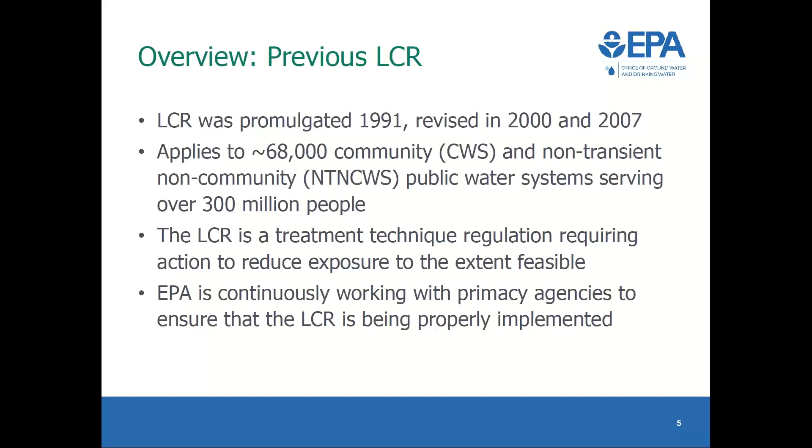Now, lead is generally not found naturally in water, but it can enter drinking water through the corrosion of lead-containing plumbing materials and infrastructure. In order to prevent lead from entering our drinking water, the lead and copper rule requires some systems to treat water with chemicals to reduce corrosion. When corrosion control treatment is not enough to reduce lead exposure, systems are required to educate the public about lead risks in drinking water and to replace lead service lines. Next slide, please.

So as part of the lead and copper rule revision process, EPA conducted extensive consultations with stakeholders and the public. The proposal was published in November of 2019, and we received about 80,000 public comments. The final lead and copper rule revision identifies the most at-risk communities and ensures that water systems are prepared to rapidly respond by taking actions to reduce elevated lead levels in drinking water. Next slide, please. Now I'm going to go into a little bit more detail about the specific requirements of the revised rule and how they compare with the current rule or soon to be previous rule. Next slide.

So some important terminology to go over. The maximum contaminant level goal is a health-based value and is set where there are no known health effects within an adequate margin of safety. In the current rule, the MCLG is set at 0 because there is no safe level of lead. For copper, the MCLG is set at 1.3 milligrams per liter.

As I mentioned previously, in 1991, the lead and copper rule established a treatment technique rule, which includes public education, corrosion control treatment, and lead service line replacement if a system exceeds the action level for lead or copper. The action level is based on the 90th percentile of tap sampling results, and for lead, this is set at 15 micrograms per liter and copper at 1.3 milligrams per liter. It is important to note that exceeding the action level is not a violation in and of itself, but not taking one of the required actions is.

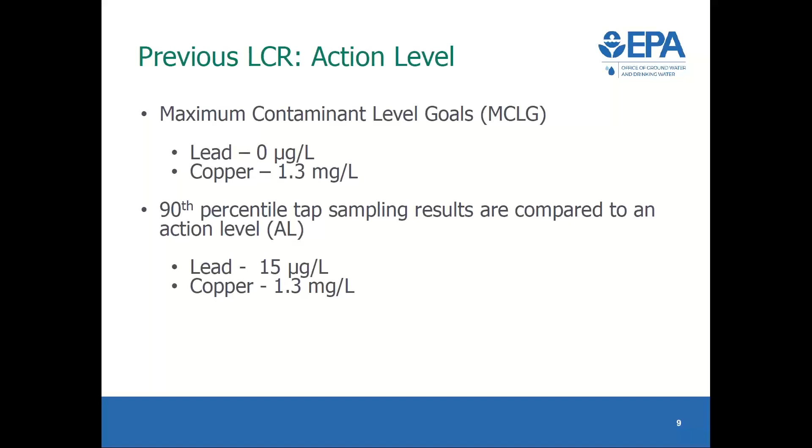So the revised rule establishes a new trigger level, which allows for meaningful reduction in lead exposure by requiring systems to take a progressive set of actions to reduce lead at the tap. The trigger level is set at 10 micrograms per liter, and this is in addition to the action level and not a replacement. For water systems that exceed the trigger level, but not the action level, there are some new requirements. They must sample annually and are not eligible for reduced tap sampling.

They must implement a goal-based lead service line replacement program and conduct public education outreach to customers with lead service lines. Systems must also conduct a corrosion control treatment study if they do not already have CCT installed, and they must re-optimize their CCT if they do have it installed. And I'm going to go over some of these actions in a few minutes.

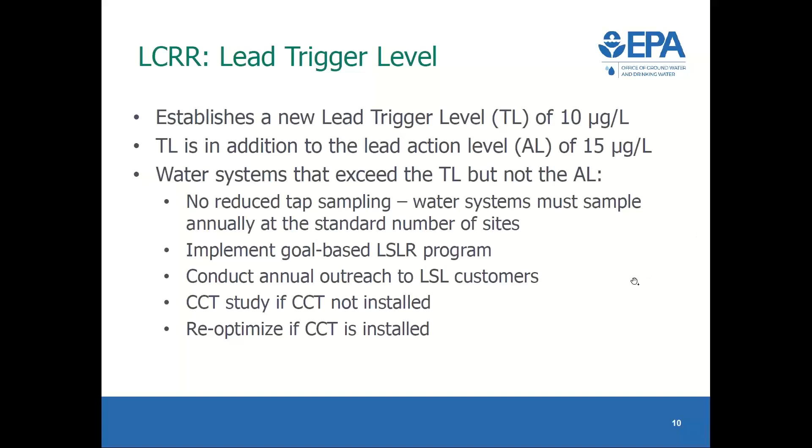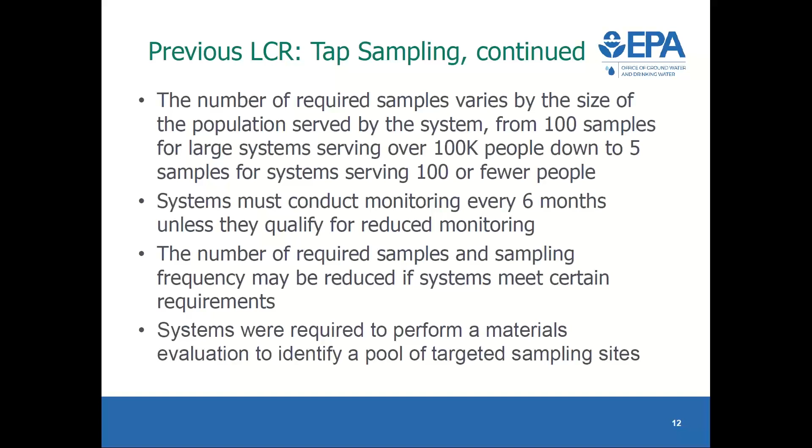Next slide, please. So currently, all community water systems and non-transient, non-community water systems must collect first liter tap samples at homes and buildings that are at the highest risk for lead and copper contamination. The number of samples required varies by the size of the population served by the system, and this can range from 100 samples to 5. The rule requires 6-month monitoring, but systems can reduce the number of required samples and sample frequency by meeting certain criteria. Systems are also required to perform a materials evaluation so that they could identify the sampling sites.

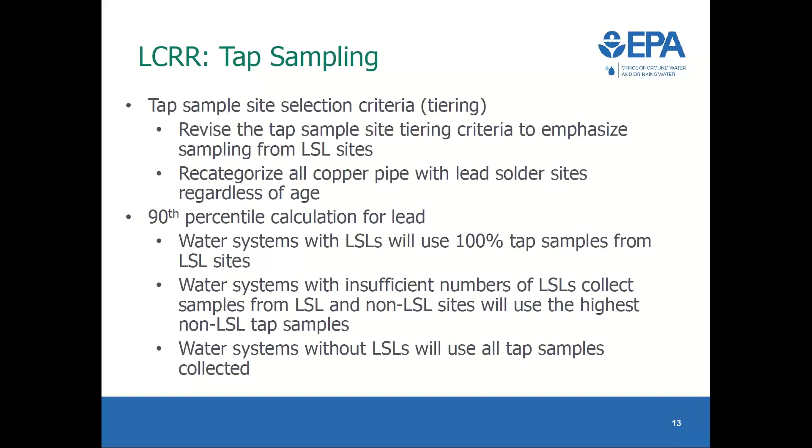There's also been a change in the tap sample collection protocol. So for all lead service line sites, the 5th liter must now be collected and analyzed for lead. This 5th liter is representative of the water that's been in contact with the lead service line. If the water system is also collecting copper at the same time, they must retain the 1st liter sample for copper analysis. The revised rule also prohibits systems from including instructions to remove and clean aerators prior to doing sampling or any pre-stagnation flushing, which might depress lead levels.

Systems must also provide wide-mouth bottles for tap sample collection, which allows for flow rates that are more characteristic of flow when filling a glass of water. Collectively, these sampling requirements will better identify elevated lead levels and result in more water systems taking required lead mitigation actions. In terms of the monitoring frequency, systems will now need to have lower lead levels longer in order to go to reduced monitoring.

Systems that are above the trigger level but below the action level must monitor at least annually and are not eligible for triennial monitoring. Systems above the action level must monitor every 6 months and must have results at or below the action level for 2 years or 4 monitoring periods in order to move to annual monitoring. Also, systems with new sources or a long-term treatment change must do 6-month monitoring until they have the results at or below the action level for 2 consecutive monitoring periods.

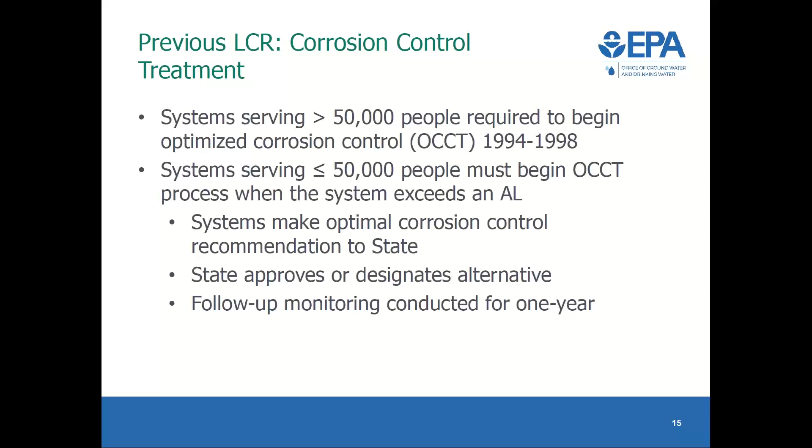Using that monitoring data, the state designates optimal water quality parameters, and the system must maintain those OWQPs. So as I mentioned earlier, exceeding the action level is not a violation, but failure to maintain the optimized water quality parameters is. One important thing to note here is that small and medium systems under the current rule can discontinue the OCCT steps if they meet the action level in 2 consecutive monitoring periods. So one thing we were seeing is that systems would be in this cycle of starting and stopping the OCCT steps and might not actually ever install corrosion control treatment.

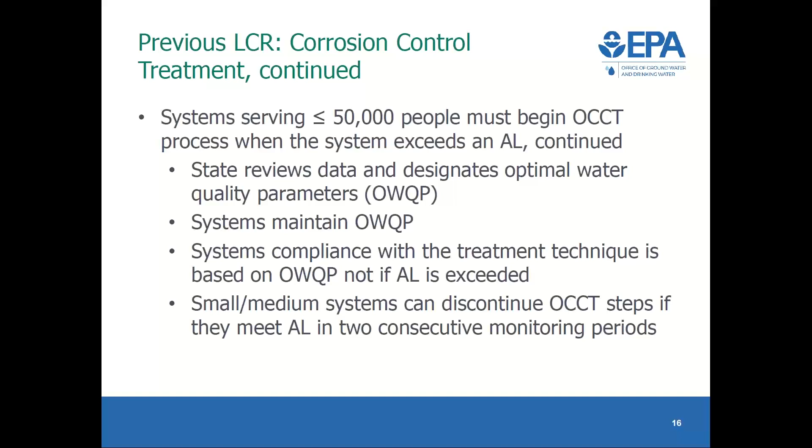Under the revised rule, water systems with OCCT are required to re-optimize if the 90th percentile exceeds either the trigger level or the action level. Systems without OCCT must conduct a study if they exceed the trigger level and then implement it if the action level is exceeded. So this means that systems will be prepared and able to install CCT faster than under the current rule. The rule also revised the sanitary survey requirements to include CCT and OWQP assessment.

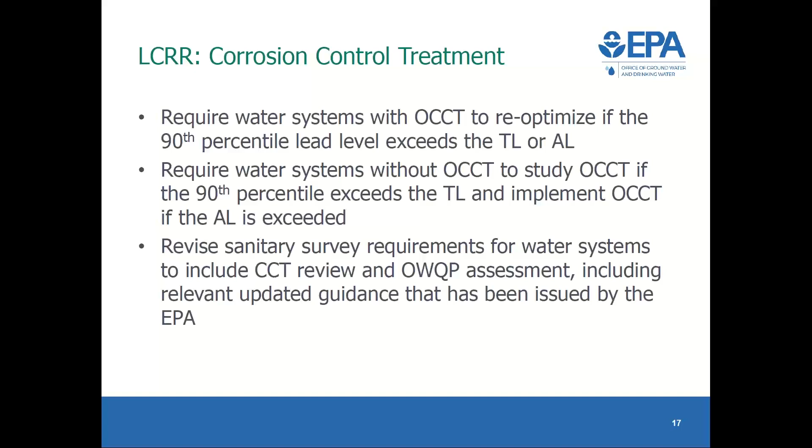So as part of the study, the revised rule requires that systems evaluate orthophosphate-based inhibitors. The rule also establishes some additional specifications for systems to study alternative CCTs. It also requires systems to conduct a find and fix for any individual tap samples that exceed 15 micrograms per liter. Next slide, please.

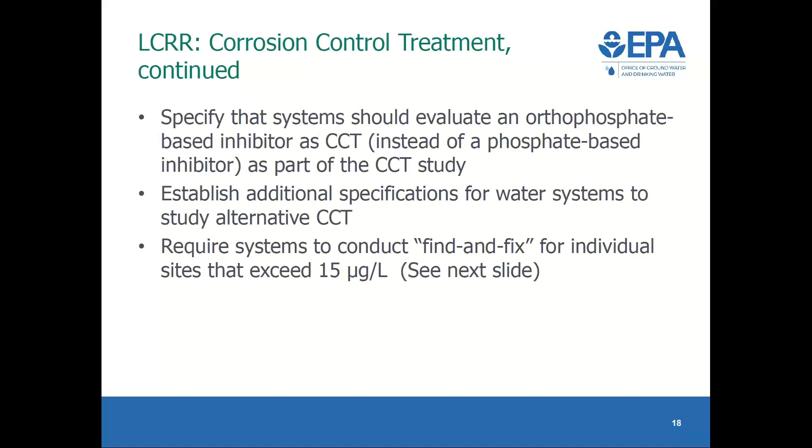Find and fix is a new requirement to address individual tap sites that have elevated lead samples, even if a system does not have a trigger level or lead action level exceedance. It requires that a system collect follow-up samples for each lead tap sample site that exceeds 15 micrograms per liter within 30 days of the system receiving the results to identify the potential source of lead. Systems may use any sampling protocol or technique to collect the follow-up samples.

So if the sample came from a lead service line site, that doesn't mean that the system has to collect a 5th liter sample. They could take a 1st liter sample or 250 mil or use different stagnation time, whatever is most appropriate to identify that source of lead. And as such, these follow-up samples are not included in the 90th percentile calculation, but they do need to be submitted to the state. Next slide, please.

If a system does have CCT installed, they must collect a water quality parameter sample within 5 days of receiving results at a site that is as close to the tap sample site as possible. Could you go back 1 slide, please? Thank you. This is to assess water quality as close to the time the initial sample was taken as possible.

Systems then must determine if some sort of a fix is needed, and this could be something like a localized adjustment to CCT, conducting flushing, or another type of localized distribution system maintenance. And I should note that EPA does not anticipate that systems will make large-scale CCT changes resulting from find and fix. Systems are also not responsible for fixing things that are deemed outside of their control, such as a premise plumbing issue. But they must document this to the state.

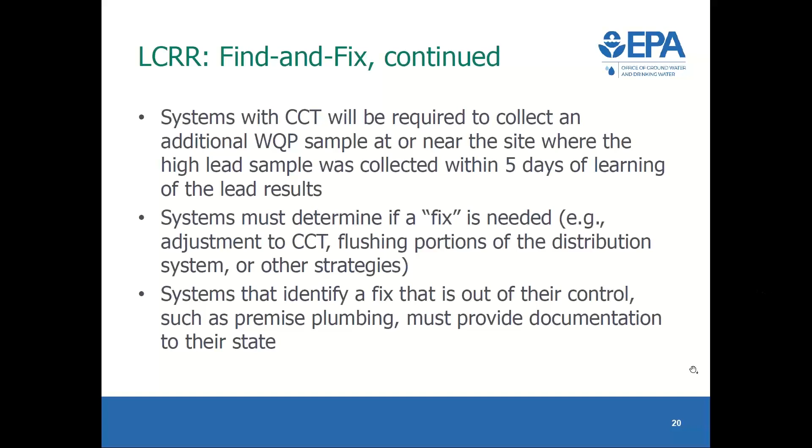Thank you, Anne. I will start with the lead service line replacement.

Current rule requires systems that fail to meet the lead action level after installing corrosion control to replace 7% of lead service lines per year. They are only required to replace their portion of the service line, so the partial lead service line replacements are allowed to count towards the mandatory replacement rate.

Water systems are also allowed to test out, which means that if they take a water sample from a lead service line and it tests at or below 15 parts per billion, then that would still count as a lead service line replacement. If the system does not own the entire lead service line, they must notify the owner that they are replacing their portion of the service line and offer to replace the owner's portion of the line at owner's cost. Lead service line replacement continues until the system meets the lead action level for 2 consecutive monitoring periods.

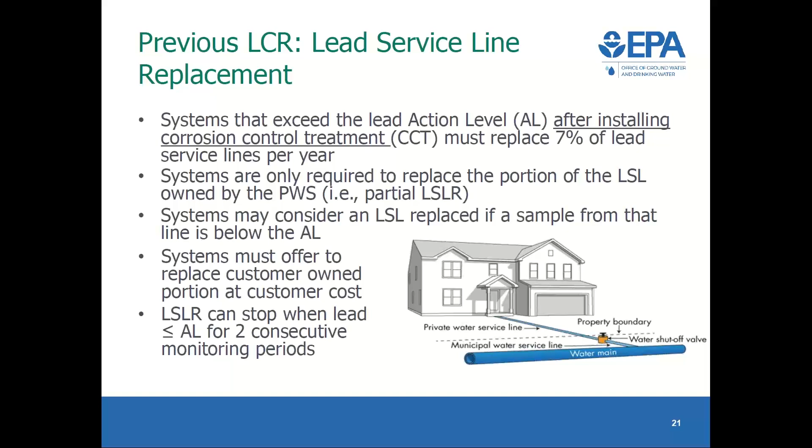If the system exceeds the lead action level after that, they must restart replacing lead service lines. Next slide, please.

The new rule starts with a lead service line inventory. Water systems must complete a lead service line inventory by the compliance date of January 16, 2024. This is important as the location of lead service lines is critical to tap sample site selection and tap sampling protocol. The inventory must identify materials of service lines within the distribution system and classify them according to this categorization.

Lead service lines; lead status unknown, or just unknown, where the service line material is not verified by the compliance date. It's okay to have unknowns in the initial inventory with improvements in updates. Then galvanized lines requiring replacement, and non-lead service lines. The inventory must be made publicly available. Lead connectors, such as goosenecks or pigtails, are not required to be included in the inventory. However, EPA does recommend including them where records exist.

Another component of the new rule is that the water system must replace lead connectors when encountered. The inventory must include a location identifier associated with each lead service line or galvanized line requiring replacement. The inventory must be updated annually, or triennially if the system is on reduced monitoring. Next slide, please.

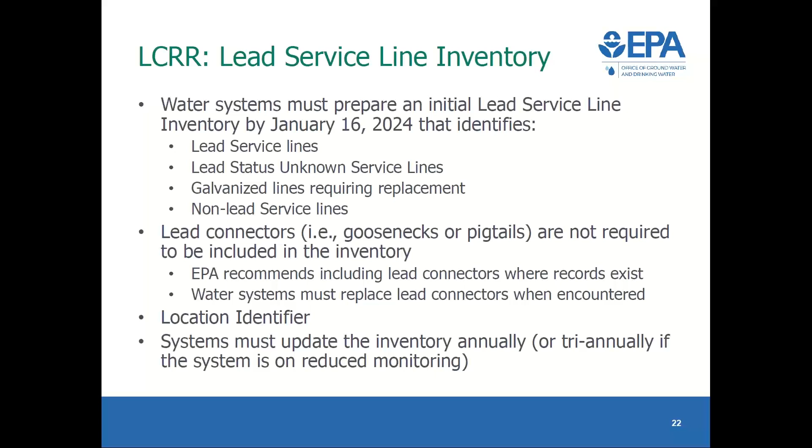A new component of the revised rule is the lead service line replacement plan, which must be submitted by the compliance date along with the inventory. According to this provision, all water systems with 1 or more lead, galvanized requiring replacement, or unknown service lines in their distribution system must prepare a sufficiently detailed lead service line replacement plan by the compliance date.

The plan must include the following 7 elements: a strategy for determining the composition of lead status unknown lines, a procedure for conducting a full replacement, a strategy for informing customers before a replacement takes place. For systems serving more than 10,000 people, the plan must recommend the replacement goal rate in the event of a lead trigger level exceedance, which I will discuss in a minute. A procedure for customers to flush the lines following a disturbance or a replacement of the service line.

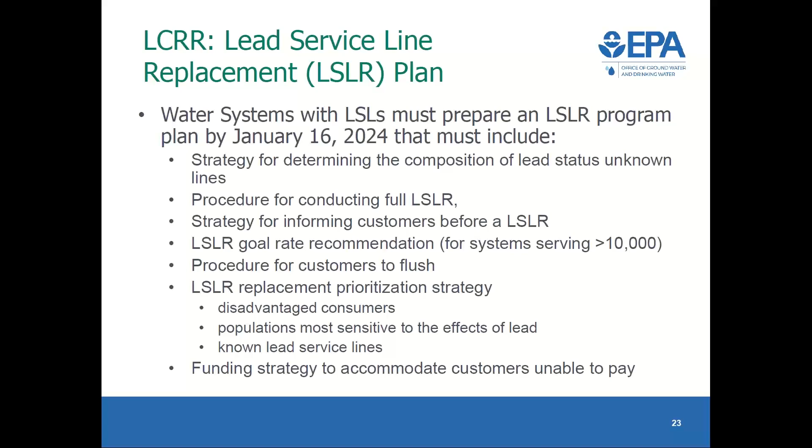A lead service line replacement prioritization strategy that at a minimum includes disadvantaged consumers, populations most sensitive to the effects of lead, and targeting known lead service lines. And the plan must include a funding strategy to accommodate customers unable to pay. Having a plan in place not only helps water systems to be ready on the compliance date, but also in general helps them meet their goals, and they are prepared when customers notify them of the intent to replace their portion of the service line. Next slide, please.

When a customer notifies the water system of replacement of the customer's portion of the service line, the water system must replace its portion of the lead service line as well. This is to prevent partial lead service line replacements from occurring.

Water systems that serve more than 10,000 persons that exceed the trigger level but are at or below the action level must conduct goal-based full lead service line replacement at a rate approved by the state, irrespective of the corrosion control treatment status. Water systems serving 10,000 people or fewer that exceed the lead trigger level, but not the action level, may choose the small system flexibility, which I will discuss shortly. Next slide, please.

In terms of mandatory lead service line replacements, water systems serving more than 10,000 persons that exceed the lead action level must fully replace annually 3% of lead service lines based on a rolling 2-year average. In these cases, they must conduct replacements regardless of the status of the corrosion control treatment. They can stop the 3% annual lead service line replacements when the system is below the action level for 2 years, and if the system has replaced an overall average of 3% of lead service lines per year.

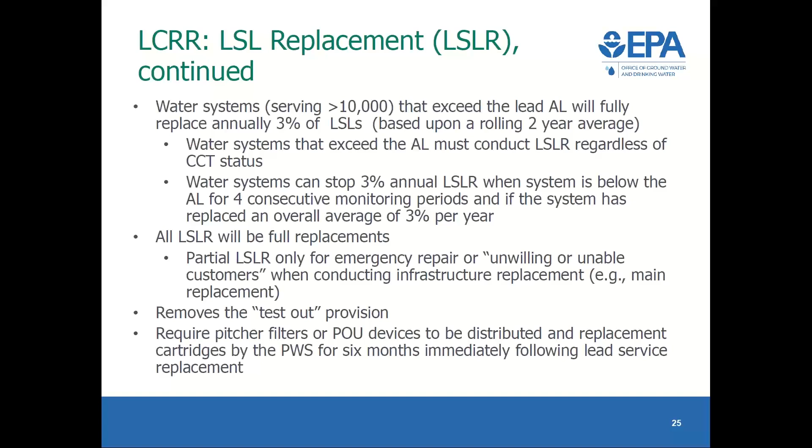For mitigation purposes, after a service line replacement, the revised rule requires public water systems to distribute filters and replacement cartridges for 6 months. Next slide, please.

As presented here in this comparison table, the revised lead and copper rule will result in overall more lead service line replacements than the previous rule. The new rule requires 3% replacements. However, it must start regardless of the CCT status. The replacements must be full replacements, and it must continue for at least 3 years, which is four monitoring periods.

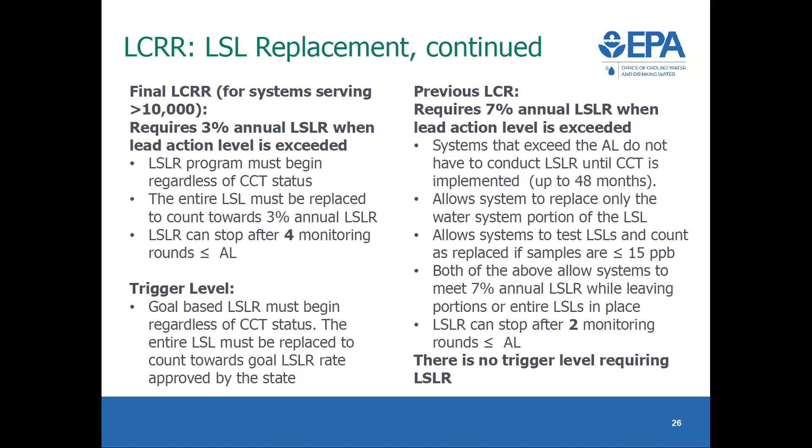The lead service line replacement rate of the new rule applies to a wider universe of service lines, which includes lead service lines, galvanized requiring replacements, and unknowns that could potentially be lead service lines. Also, in the new rule, the replacement program starts sooner at the exceedance of the trigger level, as opposed to the old rule, where it starts at the action level exceedance. Next slide, please.

Small system flexibility. So in the previous slides, I discussed requirements for systems serving more than 10,000 people. The new rule provides systems serving 10,000 or fewer persons and all non-transient, non-community water systems greater flexibility to comply with the requirements of the rule. Under the new rule, if these systems exceed the trigger level but do not exceed the action level, they must evaluate and recommend to the state one of the 4 compliance alternatives.

The compliance alternatives, which must be approved by the state, include full lead service line replacement. It should be noted that all lead service lines must be replaced within 15 years, and once the implementation of this option starts, the replacement cannot stop even if water lead levels drop. The second option is installation and maintenance of optimized corrosion control treatment.

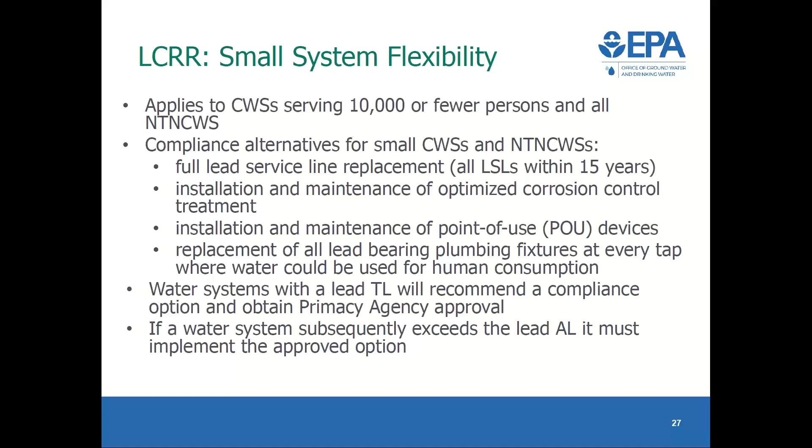Then it's installation and maintenance of point-of-use devices and replacement of all lead-bearing plumbing fixtures at every tap where water could be used for human consumption. This applies to systems that have replaced all of their service lines, but the lead levels are still high. In the event a water system subsequently exceeds the lead action level, it must implement the approved option. Next slide, please.

Moving on to the requirements of the revised rule for notification and public education. The revised lead and copper rule provides more information to the public, such as it requires that water systems let the public know the general location of lead service lines by making the lead service line inventory publicly available. And for large systems that serve over 50,000 people, the inventory must be available online.

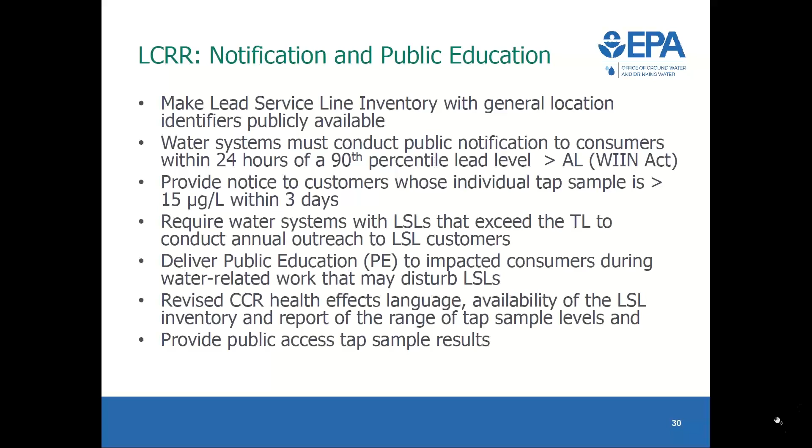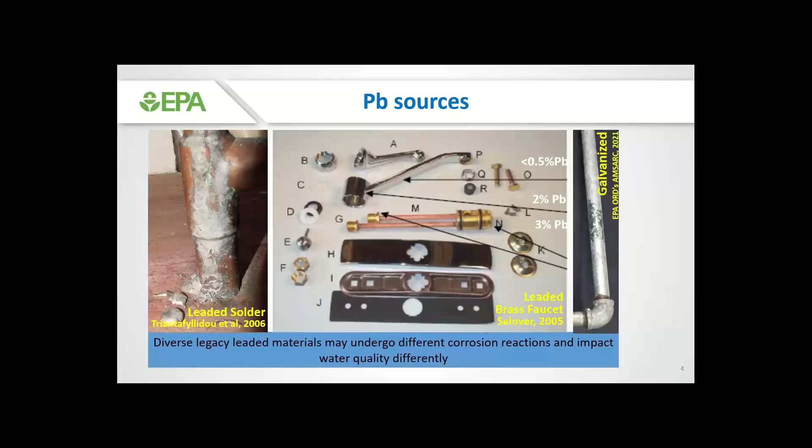Galvanized pipe is also a source of lead. Aside from the impurities of lead on the galvanization layer, perhaps its biggest contribution to lead is the fact that it sorbs lead from upstream sources and then becomes itself a source of lead and desorbs that lead back into the drinking water. Because these diverse legacy leaded materials may undergo different corrosion reactions, interact with the water chemistry differently, and result in different levels of lead contamination, it is important to have an understanding of exactly which lead sources we have in our system.

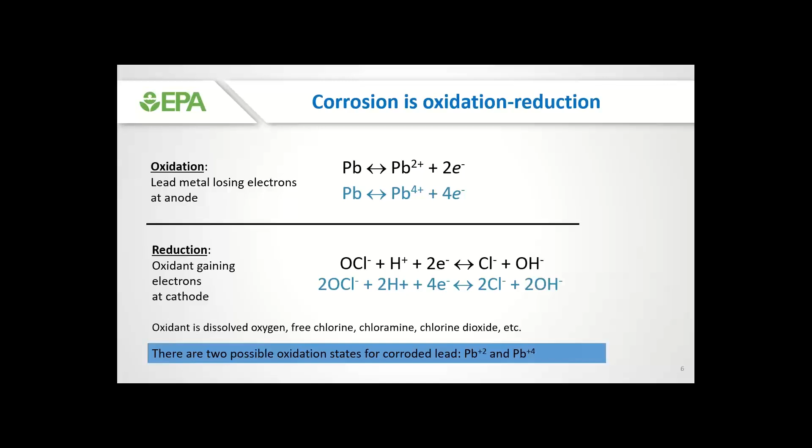Reduction is usually happening by a disinfectant in the water, some sort of oxidant, such as chlorine species, for example, if we add chlorine in the water for disinfection, and the oxidant consumes the electrons that were released by the lead metal when it was oxidized. There are two possible oxidation states for corroded lead, either lead +2 and lead +4, and those will become important in a minute.

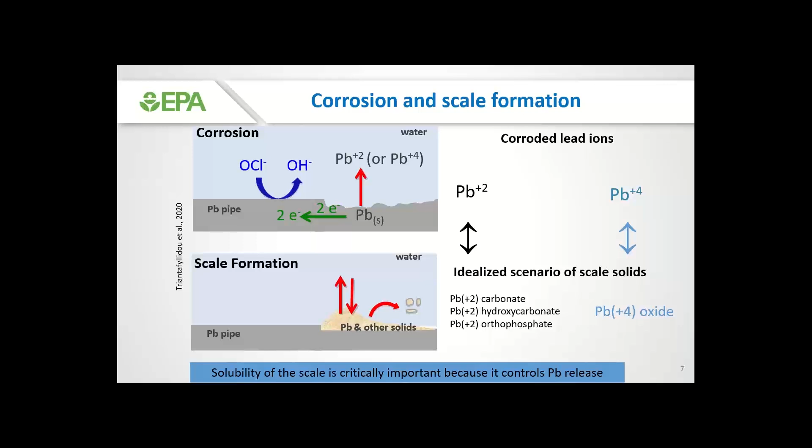We're not necessarily going to go into particulate lead release in this presentation. It's a pretty complicated and hard to predict, almost semi-random phenomenon, but it's also important in total lead release as well. The minerals that were mentioned in the previous slide are kind of idealized situations.

In practice, scale on the interior surface of lead pipes can be very complex, and these are photographs of lead pipes received at EPA's AMSARC and analyzed here. They're close-up photos of what pipe scales look like in 9 samples that were analyzed, and you can see that there really is, at least visually, a variety of scale. They have different colors, they have different textures.

In some cases, like in the top right pipe, you can see that part of the scale basically was dislodged from the pipe. So these are very complicated situations, not as simple as I made them sound in the previous slide. In some cases, we may even have other constituents on the scale, not just lead. Those could be anything from aluminum, manganese, iron, phosphorus, and calcium. And if we have coatings like that, which are thick, they may actually interfere with the orthophosphate chemical that we want to add for corrosion control.

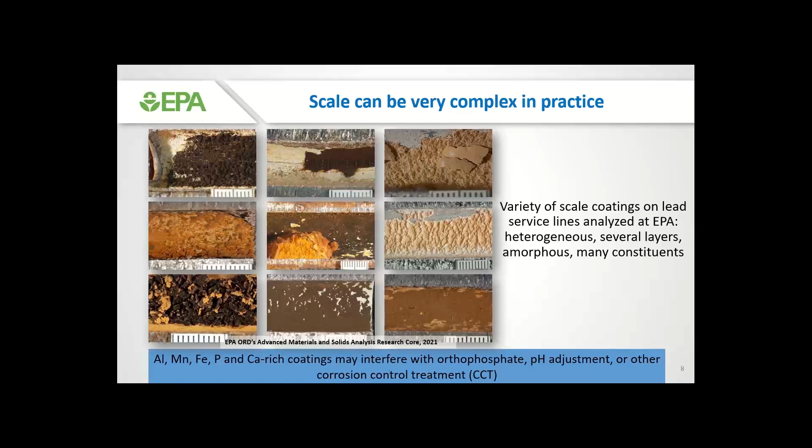They may interfere with pH adjustment or other corrosion control treatment that we choose. So going back to that concept of corrosion and metal release, pure corrosion itself, so those reactions of oxidation reduction that are electrochemical and we have electrons flowing, those are important for pure fresh lead pipe at the very beginning, but they become less important when the surface of the pipe becomes covered with scale.

So for legacy pipes being in service for decades or even a century or more, pure corrosion is not as important. What becomes important is that makeup of the scale that has formed, and specifically the lead solubility of that scale at the water contact. Also the physical properties of the scale, how easily it can be physically destabilized by hydraulic disturbances.

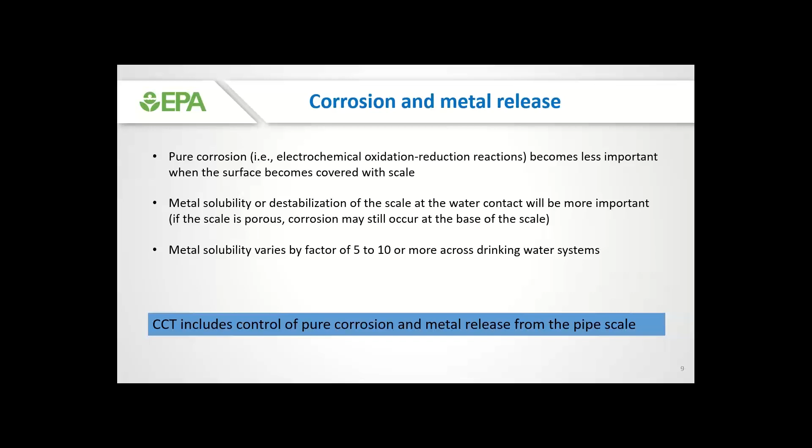Because the makeup of the scale is so different among drinking water distribution systems, lead solubility, therefore, is very different among systems. It can vary by a factor of 5 to 10 or more, and it's important to understand which waters are corrosive and which are not corrosive, and really try to control the corrosivity through appropriate corrosion control treatment, which needs to address both that early process of pure corrosion, but also metal release when we have the scale that has formed.

There are many factors that affect corrosion and metal release, and we don't have time to talk about all of them, but we will talk about some key ones. So we'll talk about pH and the carbonate system expressed by alkalinity or else dissolved inorganic carbon. We'll talk about the presence of oxidants in drinking water, primarily disinfectants, because those affect the oxidation reduction potential of the water or else its oxidizing power. We'll also talk about corrosion inhibitors and some particularly important ions like chloride and sulfate.

Let's start with pH and oxidation reduction potential because they really control metal release. This is a simplified Pourbaix diagram. You can see on the x-axis pH ranging from 0 all the way to 14. And on the y-axis, you can see that oxidation reduction potential of the water. In drinking water situations, we always have an ORP that's high enough to unfortunately not be in the immune area of the graph. That would be basically the lead pipe not corroding, just staying in place as a solid.

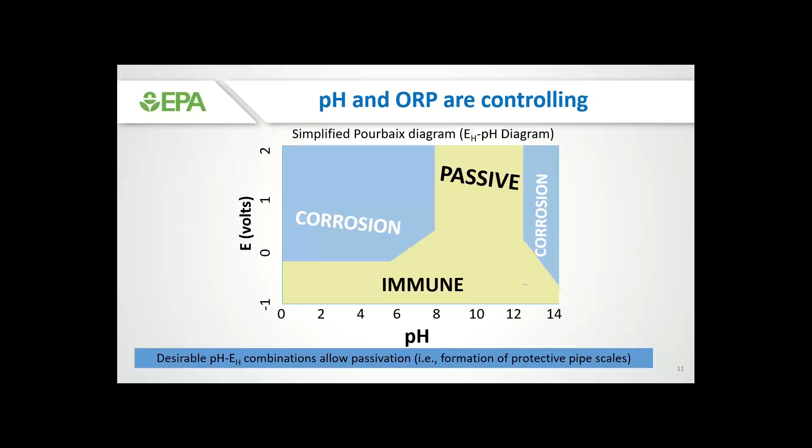But our second best bet is to create conditions that allow us to be in that passive area of the graph where we have just the right combination of pH and ORP to form these protective scales. Because if you look in this generic simplified Pourbaix diagram, if we move to the left of that passive area or to the right, we're actually in the active corrosion region, which we want to avoid. So we want to have desirable pH and ORP combinations to allow for formation of those protective scales.

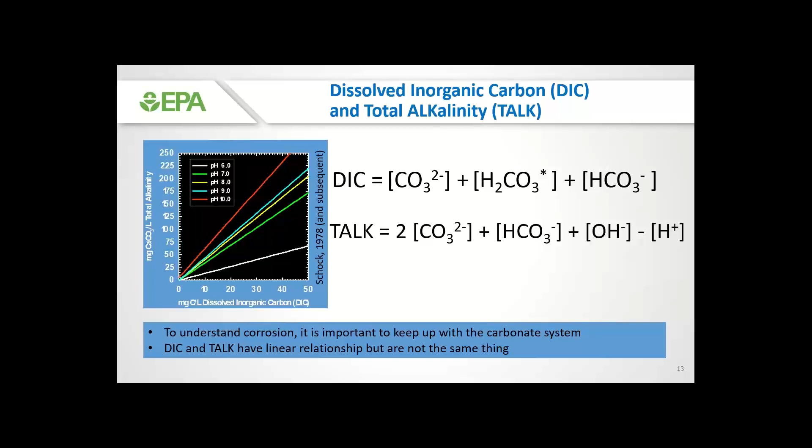But we also measure our alkalinity as well, and this is the simplified equation for alkalinity in most drinking waters. Alkalinity also involves carbonic species, as you can see, but OHs and H+, which means there's a pH dependency as well. To understand corrosion, it is important to know what the DIC is or what the alkalinity is in our drinking water. And those two do have a linear relationship, but they're not the same thing. If we know the pH and know one of the two, we can basically calculate the other. The diagram on the left here is basically showing that linear relationship between DIC and alkalinity.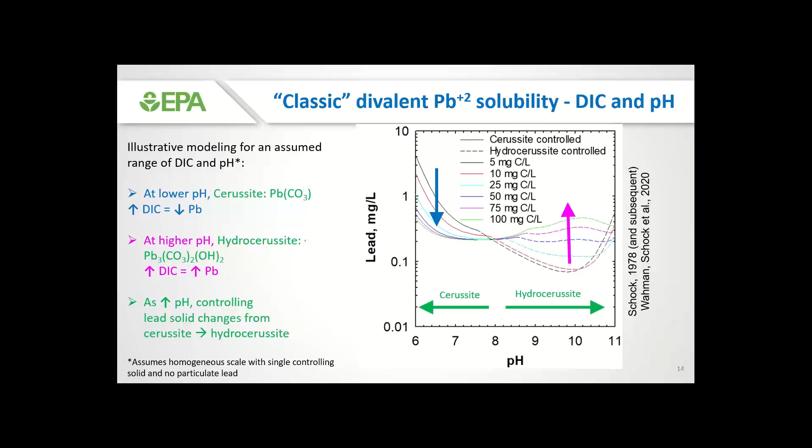It is based on theoretical solubility modeling. So it does assume a homogeneous scale with a single controlling solid, either cerussite, which is a lead carbonate, so again the DIC is important because it gives the CO3 component to form that solid, or hydrocerussite, where again DIC is important, forming the lead hydroxycarbonate. But the impact of DIC is different depending on where you are on the graph. And you'll see that there is kind of a narrow pH range at the upper 7s or around 8, where actually the impact of DIC is not as important as it is in other areas of the graph.

I talked about ORP earlier. ORP is really important, but we don't typically measure it in drinking water. It is the oxidation reduction potential of the water, and it's highly dependent on the disinfectant type and dose. These are measurements from an older experiment at the EPA, where you can see on the x-axis the oxidant dose in milligrams per liter added to the water versus the ORP measured on the y-axis.

So at the bottom of the graph, you see data for just dissolved oxygen, no disinfectant added to the water. In the middle, you can see monochloramine, NH2Cl, and at the top with the red color and the green color, you can see chlorine species. So different oxidants really truly have different oxidizing power. For example, you can see here that ORP for chlorine is higher than monochloramine.

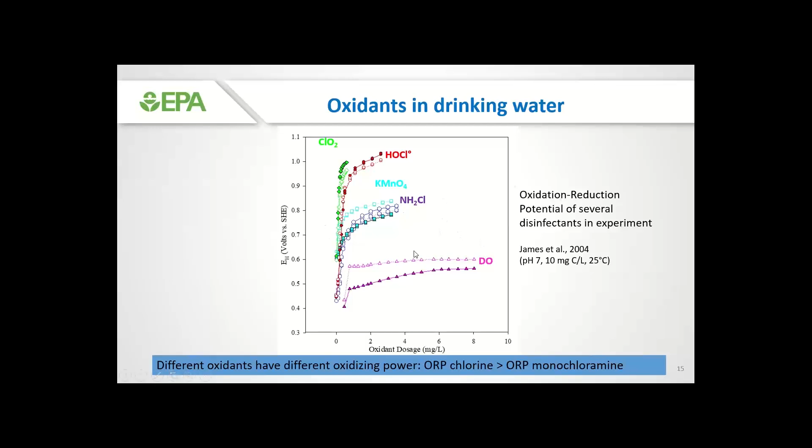But if we assume that we're here in the middle ORP range of this graph, so we're stuck with this divalent lead +2 solubility, let's go back to the solubility diagram and look at that again from a different lens. If we have a system with lead service lines, and we base our understanding on these theoretical solubility modeling calculations, we really would need a very high pH to minimize lead solubility. To be at the absolute lowest point in these curves, we would actually need to be forming hydrocerussite as the controlling solid, so therefore we would need fairly high pH, and we would need pretty low DIC as well.

So the truly optimum range of pH and DIC is very limited, very narrow. There are certainly systems that can accomplish that, but not every system will be able to do that, which then brings us to corrosion inhibitors, chemicals that we add into the water to help control lead release. There's a lot of different kinds. Orthophosphate can be added either alone or as a zinc orthophosphate. You probably have heard of polyphosphates as well, added either alone or as blends with orthophosphate.

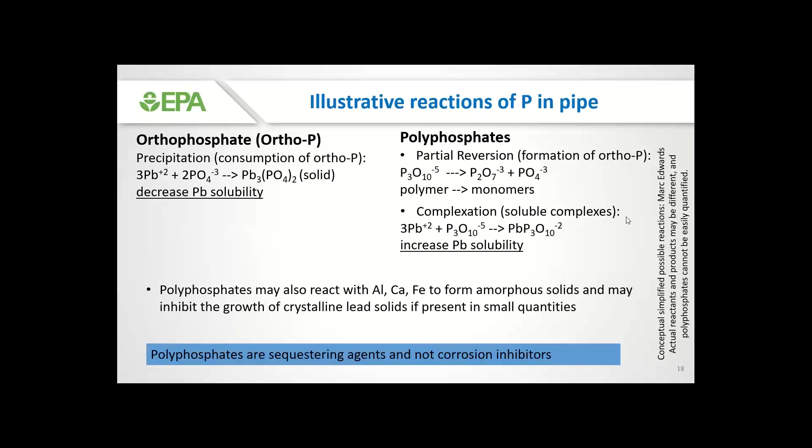These generic reactions show the interaction of phosphate with lead, but phosphates may also react with other constituents in the water. So even for polyphosphates, they may react with, for example, aluminum, calcium, or iron to form some sort of film there. It could be amorphous. And they can also actually inhibit the growth of the good crystalline lead solids that we want, based on what I'm told from our researchers at the AWBERC lab. So overall, polyphosphates are sequestering agents and not corrosion inhibitors. So let's stick to ortho to control lead release.

The effectiveness of orthophosphate really depends on the dose for the underlying DIC and pH of our water, and also for the cleanliness of the lead pipe that we actually have. This is, again, theoretical lead solubility calculations depicted on the graph. On the x-axis, you can see the phosphate added in milligrams per liter from 0 to 5. And on the y-axis, you can see lead solubility in milligrams per liter of lead. So again, we really want to minimize lead solubility on the y-axis to be at the absolute lowest point of any of those curves. The different colors depict different pHs from 7 to 8.5.

And you can kind of see two groups of curves. The top ones have to do with high DIC, dissolved inorganic carbon of 48 milligrams per liter, whereas the bottom curves represent a low DIC condition of 4.8 milligrams of carbon per liter. If we focus at these lower curves first, the pH is not as important. For these, the curves are pretty close together, and the pH doesn't make as much of a difference as it does for the higher DIC condition. And for the higher DIC condition, the point of diminishing returns for orthophosphate is actually higher. That means we need to add more ortho in the water to start minimizing lead leaching based on this diagram.

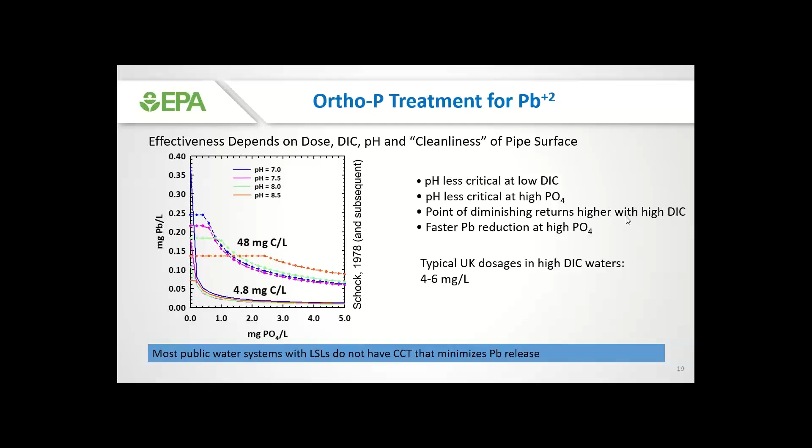But most public water systems with lead service lines do not have corrosion control that, strictly speaking, minimizes lead release in the sense that we're absolutely at the lowest point of any of these curves, because it's really hard to achieve. So our colleague at EPA Region 5, Miguel del Toral, coined this term of point of diminishing returns for orthophosphate, where basically he suggested adding orthophosphate up to a point after which additions of orthophosphate would result in only small reductions in lead release, and he suggested that that's the key to cost-effective lead release control.

But do keep in mind that these background constituents that we mentioned before that can make up scales, such as aluminum, hardness ions, iron, manganese, and others, may interfere with that orthophosphate concentration, and we may actually need more if there's a thick pipe scale layer there instead of a fairly smooth, clean pipe. So the point of diminishing returns for orthophosphate will vary with the background water chemistry and with the makeup of the scale from system to system.

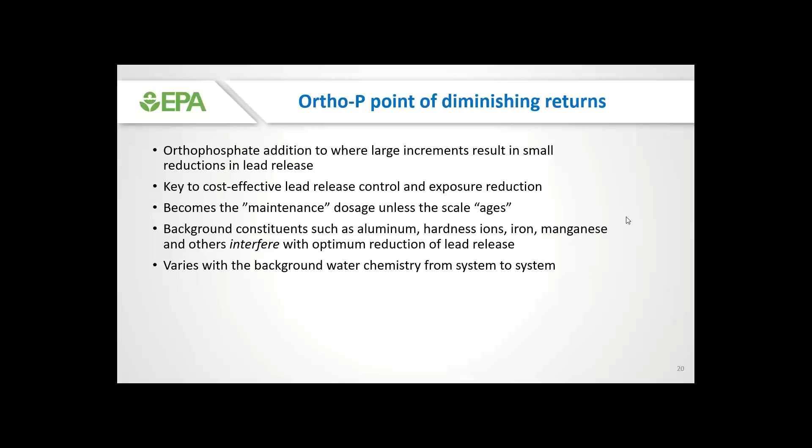So in order to make sure that we don't have lead leaching problems, we need to ensure that we have high free chlorine residual throughout our system and low chlorine demand, so that we can maintain that ORP high enough throughout areas of our distribution system where we have lead service lines. And of course, the pH must be maintained as well.

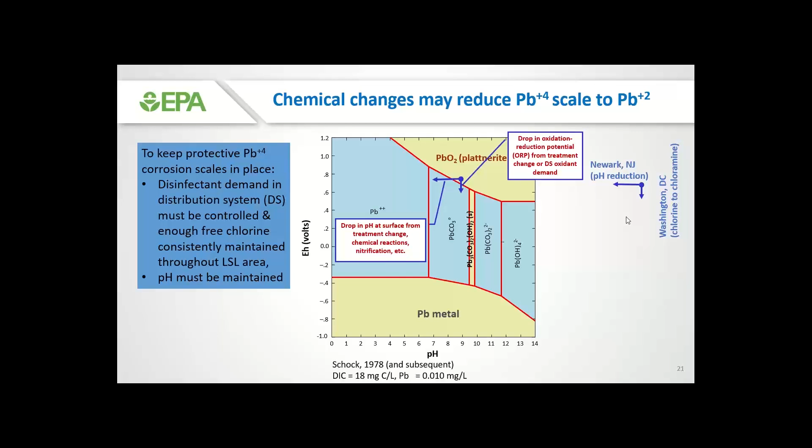Talking a little bit about... So Simoni, this is Tom. We're running out of time a little bit. Could you speed up a little bit? Yes, absolutely. Thanks, Tom.

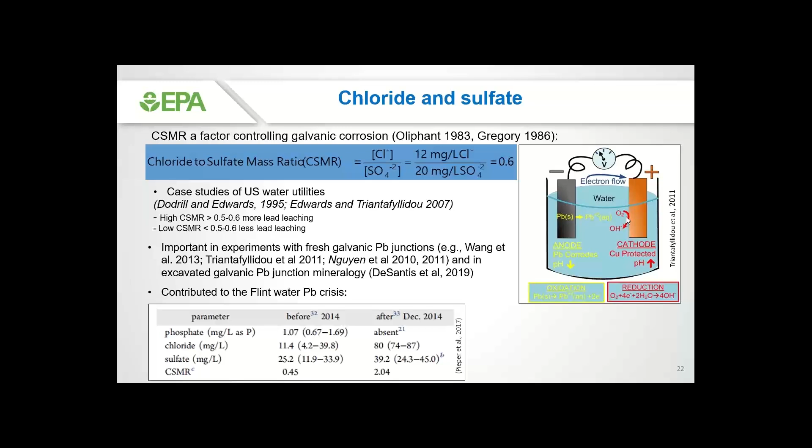Talking a little bit about chloride and sulfate, you may have heard this term, chloride to sulfate mass ratio. It's basically chloride divided by sulfate. It's been empirically shown to be important: the higher the chloride to sulfate mass ratio, the higher the lead leaching. An example was Flint, where the table at the bottom shows that when water quality changed, the chloride to sulfate mass ratio moved from about 0.5 to about 2, which was one contributing factor to lead leaching there. The CSMR is an important ratio empirically in aggravating lead leaching, especially galvanic corrosion.

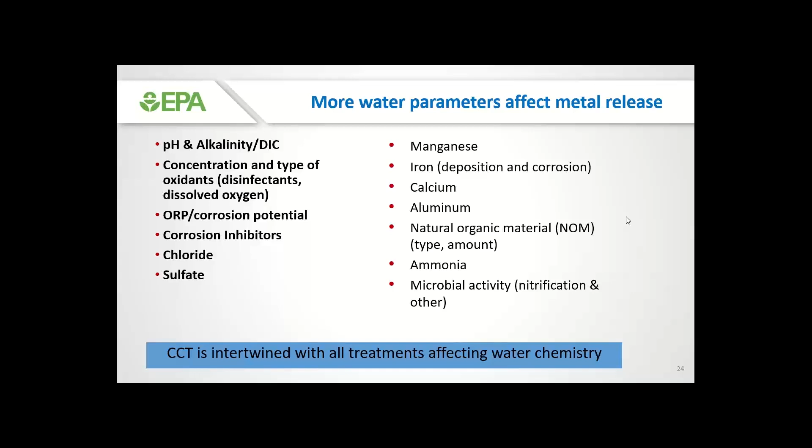So any water treatment change that affects this ratio, a coagulation change, for example, changing chemical, must be evaluated. But the absolute concentrations of chloride and sulfate individually are also important, particularly chloride, which is a very aggressive ion for lead, copper, iron, and metal corrosion in general. There are a lot of parameters that affect metal release aside from the ones I've had time for. So please keep in mind that corrosion control treatment is intertwined with all of these other things that affect water chemistry and the makeup of scales, such as manganese, iron, calcium, and others that I mentioned earlier.

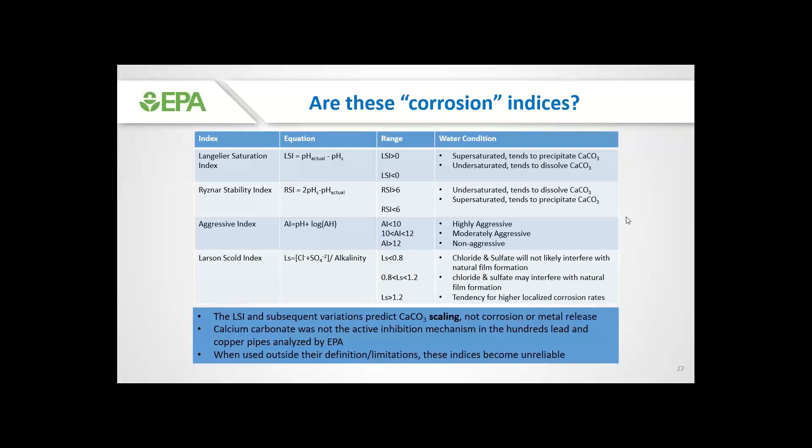At the very end, I'd just like to very briefly point out that there are some indices talked about in engineering textbooks, sometimes called corrosion indices. I've listed some here. If you look at how they're defined and calculated, they're really focusing on calcium carbonate scaling rather than corrosion or metal release. And based on the work done at the US EPA, calcium carbonate scaling is very rarely present in pipe scales, and when it is, it's not the controlling factor to lead release. So please use caution using those indices. They're important calculations, but they become unreliable as corrosion indices.

So with that, materials inventories are critical to understand where and what lead sources still exist. There are many types of scale in lead pipes. Remember, lead +4 solids are way less soluble and therefore more desirable than lead +2. Polyphosphates are not really corrosion inhibitors.

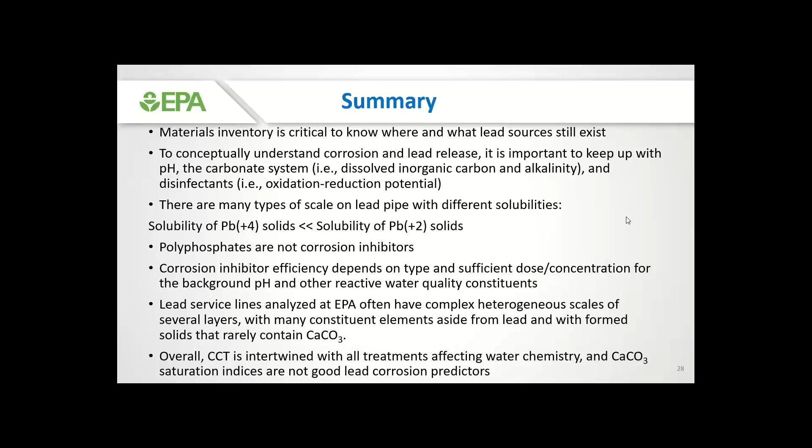And as I mentioned earlier, pipes analyzed at the EPA have very complex heterogeneous scale layers, rarely containing calcium carbonate, making those corrosion indices not true corrosion indices. And in the end, corrosion control treatment is intertwined with all treatments affecting water chemistry.

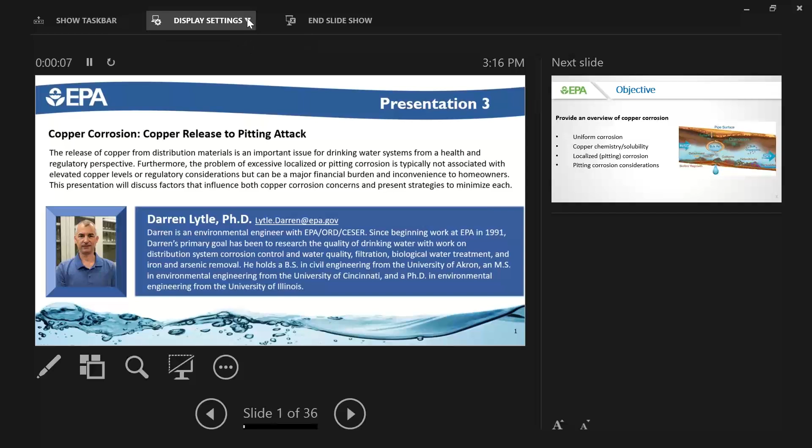All right, thank you, Tom. Can you hear me okay? Okay, let me get this straightened around. Yep, sounds good. All right, so I'm gonna roll as soon as I get this straightened out here. Swap presenter. How's that? Looking good? Okay, so I'm gonna go ahead.

I'm gonna talk about copper. I'm going to give you some background on copper. I'm going to talk about soluble copper levels or uniform corrosion. I'm going to talk about chemistry of copper. I'm going to talk a little bit about pitting corrosion and some things to consider when you have a pitting problem, which is getting a lot of interest these days with me.

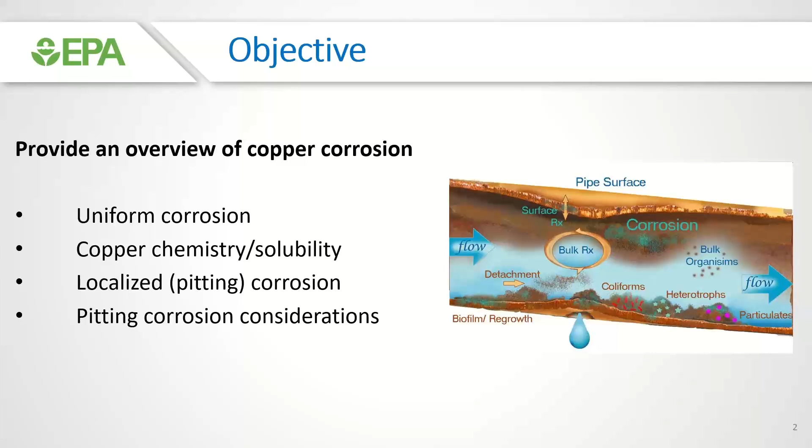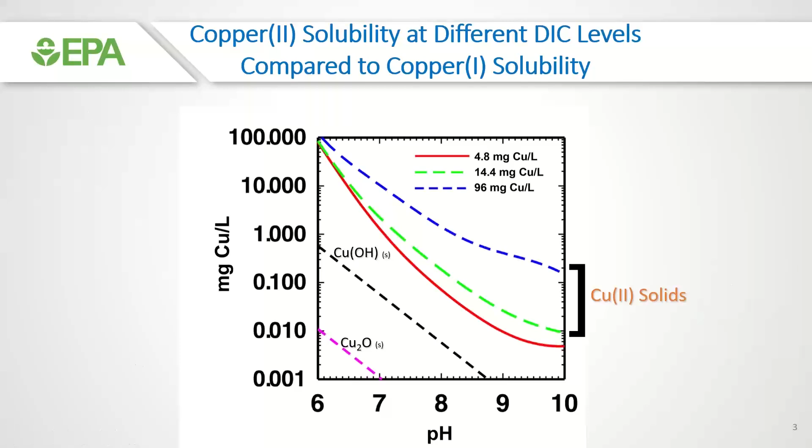And that's not to say copper 1 chemistry isn't important, because we always do find copper 1 minerals on copper pipes. And there are cases that we've been involved with historically, let's say low DO groundwaters that are not adding disinfectant, and then they switch to adding disinfection. So they shift the copper chemistry on the pipes from copper 1 to copper 2, and then they have a big problem. So we have certainly run across that, and it's something to be aware of, but generally we consider copper 2 chemistry as being most important.

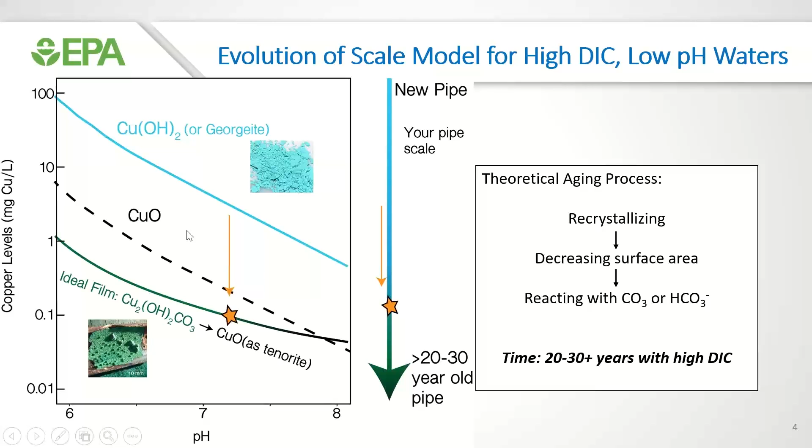And why is this important from a practical standpoint? Well, again, when we think about the lead and copper rule, we're targeting worst case lead sites. That would be locations that have lead service lines, and of course, those are going to be older facilities. So to catch a high copper level associated with a lead service line site might be a bit tricky. It would have to be some sort of situation, perhaps, where there'd be a replumb or something like that. But generally, the two don't go together. That's kind of the point of this.

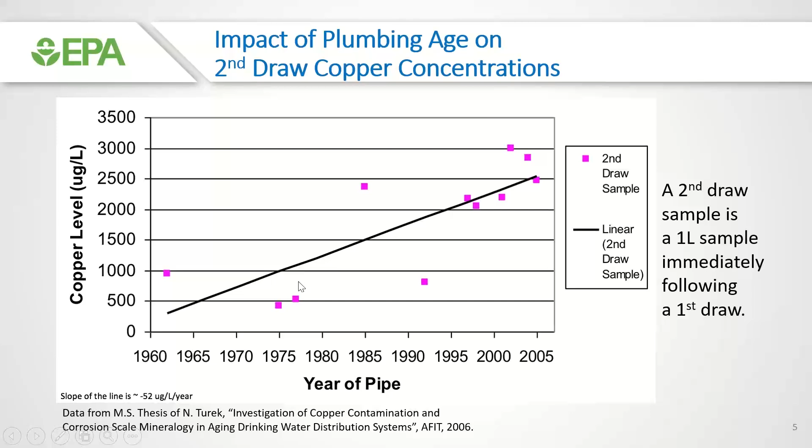Copper levels are actually, as it turns out, pretty easy to predict, and that's sort of the nice thing about copper relative to lead, because newer copper is going to give you the highest copper levels. It's pretty predictable, and you can actually do precipitation experiments even to see what copper levels might be in a particular water. But we're using precipitation experiments here to simply precipitate copper in the presence of different pHs and different dissolved inorganic carbon concentrations.

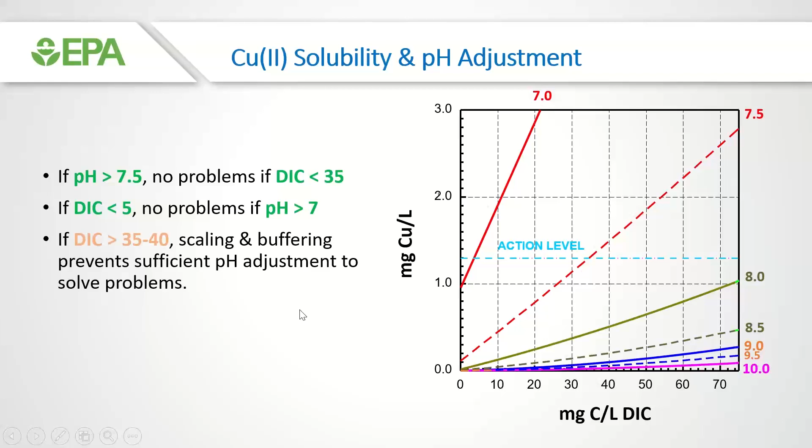Well, can you raise the pH? That could be an issue, because it might take a lot of base to raise the pH in a water that has a high DIC or high buffer intensity. Second of all, a lot of the waters that we deal with, at least in the Midwest, also have a lot of calcium. So you're also talking about some scaling issues that might come about by trying to increase the pH. So what do you do about this difficult, challenging high DIC water that affects copper levels? Well, orthophosphate's an option. And once again, the nice thing about copper is it's fairly predictable.

Now, the theoretical line and where things sort of fall apart is that we don't really understand exactly what's precipitating. So theory doesn't predict this, and we continue to try to understand this and study it these days because we still don't fully understand, because the material that we generally precipitate is an amorphous-based material. But nonetheless, it really is effective.

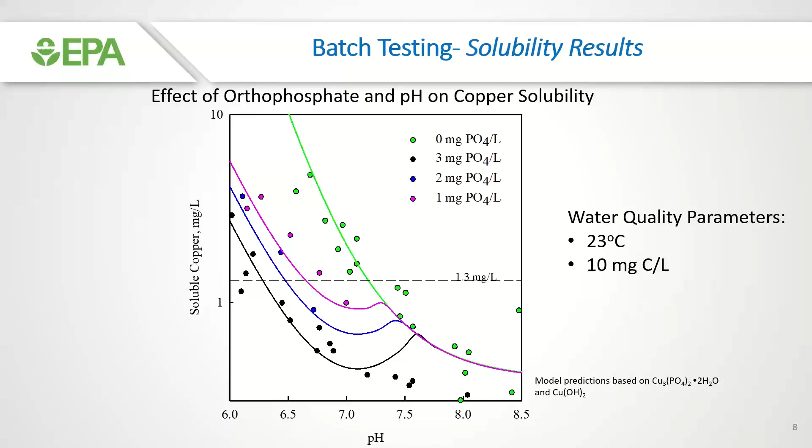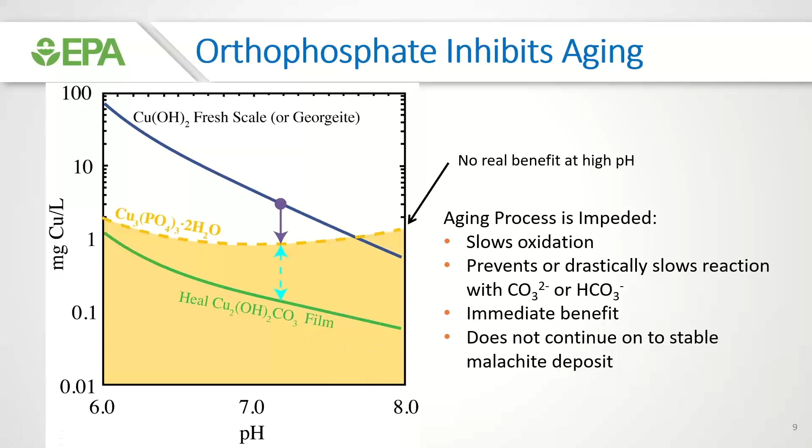Now, the downside to this is that you will observe an immediate benefit, but you won't fully benefit from the full aging process. So aging sort of stops by the addition of the orthophosphate. So what you see is an initial benefit, a potentially big benefit when it comes to getting down below the action level. However, in the long run, you might not see the benefit of fully achieving the stable, ideal cupric oxide or malachite scale that could form as the aging process goes on.

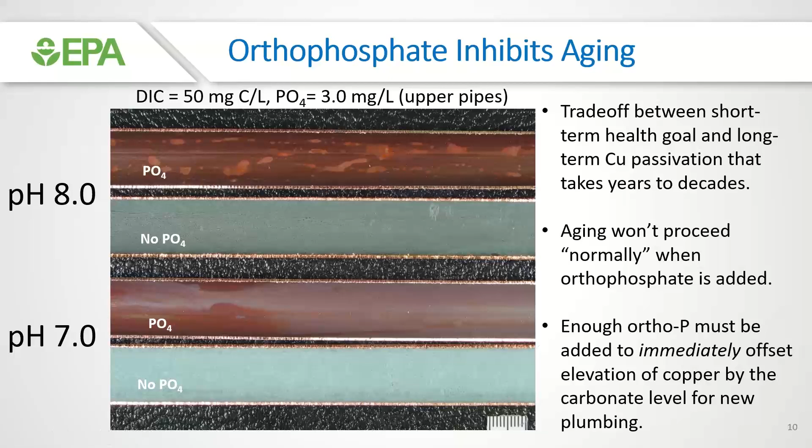And again, there's a lot we need to learn. We need to understand what exactly is going on here in the prevention of solids forming on the surface and what is forming and slowing down the copper levels and copper release.

Another set of experiments that we did was with copper recirculating loops. Unlike lead, where you have to go out and harvest old lead service lines, the complexity of lead service lines, the multiple layers that Simoni talked about that play into lead release, isn't so important with copper. In fact, you can start with new copper plumbing because it's still relevant. People are still putting it in. It represents the worst case scenario. So you could use new pipes to study copper release and copper corrosion and look at strategies to reduce it.

Another approach is simply doing the precipitation experiments that I mentioned. Just add copper to your existing water chemistry, filter out the particles that form, look at the soluble fraction left, and that gives you a pretty good indicator of the worst case copper levels you might see in a system. You could add orthophosphate to those jar tests, precipitate copper, and get a sense for what phosphate dose you need to get below the action level of 1.3 as well.

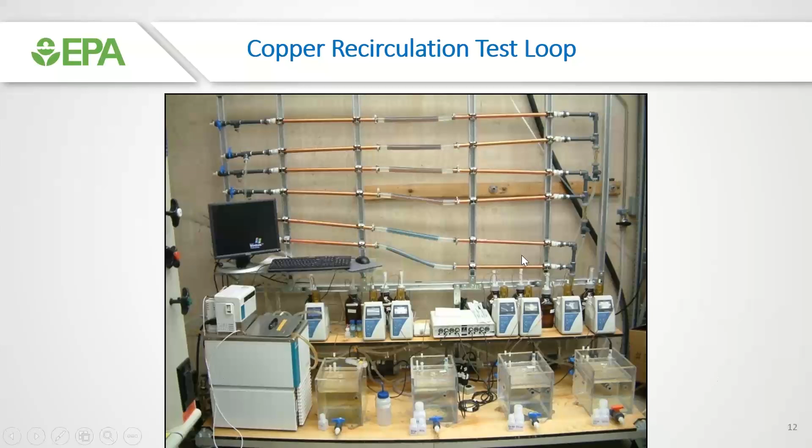In these experiments, we recirculated water around copper loops, and I'm not going to go into too many details to save some time here, but this illustrates the aging effect.

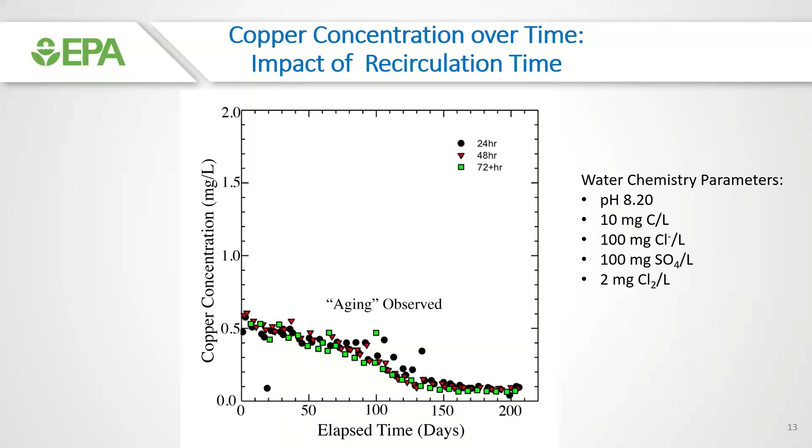You're probably thinking, geez, Darren, you said decades. Well, this is a continuously recirculating system, so it's a different scenario, but nonetheless, the point of aging is illustrated here.

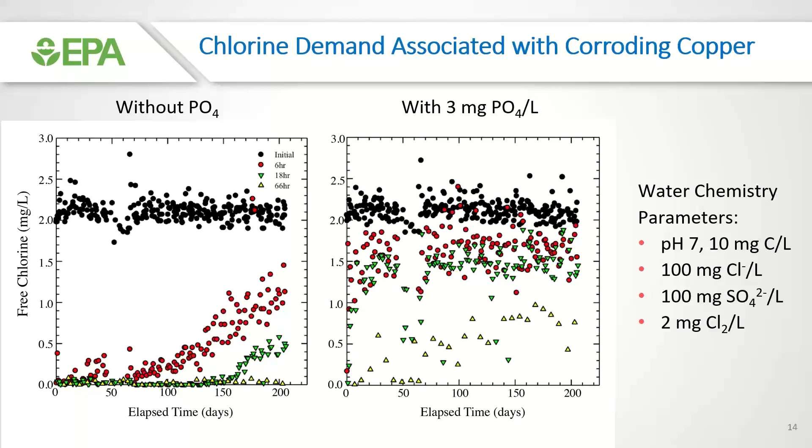People are always saying, well, you add orthophosphate, you're feeding the bacteria, and you're gonna increase your biofilm. And I always say, when you have good corrosion control, particularly in a building where copper plumbing is used and you're adding orthophosphate, this really helps you maintain the chlorine residual. So what's better, no chlorine residual or adding orthophosphate to reduce the interaction between the chlorine residual and the pipe? Because that's basically what you're doing here, interfering with the oxidation of the metal pipe wall, because the orthophosphate's there for good corrosion control. So really, really important point.

This is another way of looking at it, just to show that even for pH 9 and for 7, this is the total amount of chlorine consumed over this experiment of 150 to 200 days with orthophosphate and without. So big benefit.

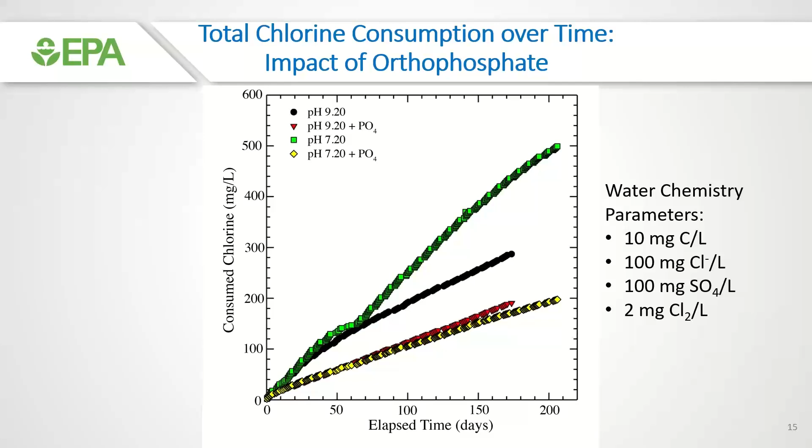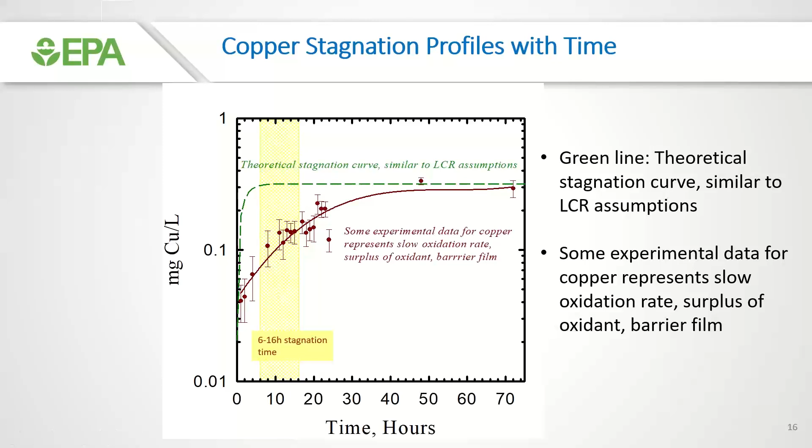And I just wanted to show you here stagnation profiles. Most of you are probably aware that if you let your water sit, you can get different copper levels because copper diffuses away from the pipe surface into the bulk water. So if you take a sample at 6 hours, versus letting that water sit for 16 hours, copper levels are going to be quite a bit higher at the end of 16 hours and beyond. So when it comes to sampling, stagnation time is important in copper release.

Now I want to jump into pinhole leaks and pitting corrosion. To be honest with you, it wouldn't surprise me if more of you are interested in this, because hands down, the most technical assistance questions I get and the most downloads of my publications historically are associated with copper pinhole leaks. Huge, huge problem. I probably get a call a week on copper pitting corrosion. It's crazy. I know it's an issue all over the place. So let's talk a little bit about it.

Why are we concerned about it? Well, costly repairs, leaks behind walls, mold and mildew could result, liability issues. It's complicated, many opinions out there. There's a lot of misinformation, a lot of passing the blame. The kinds of stories I hear when I get involved are unbelievable. The other side note is that I don't think I've ever seen a situation where someone said, I've got a pinhole leak problem in my community, and there's high copper levels associated with it. They just don't go hand in hand.

So what can I tell you about it? Well, it's complicated, and when a community or residents come to me, I say, look, you've got to take a look at this from a multiple approach standpoint. What are the solids analysis, scale analysis? Can you learn anything from looking at the surface? What's the water chemistry? What are the field observations?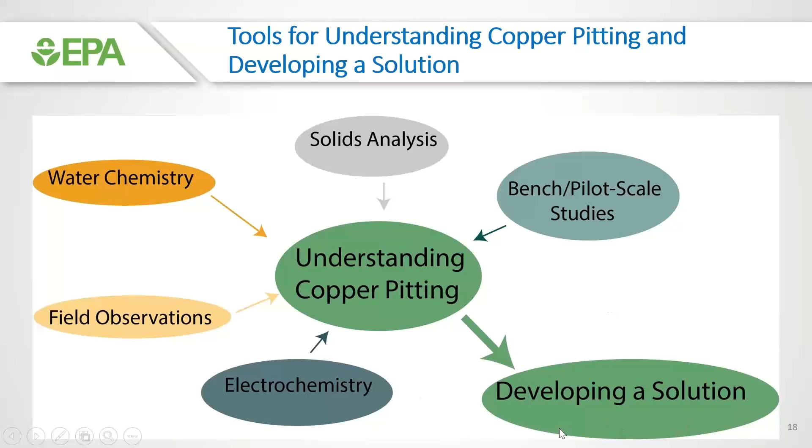Not just in the community that has a problem, but potentially neighboring communities that are using the same water source but don't have a problem, or parts of the community that don't have a problem. Oftentimes it's the newer parts of the community that have the problem, and the older parts don't. There is an electrochemistry component here potentially, because it is an electrochemical process. Bench scale studies, pilot scale studies, I'll show you a little bit about that, and it all leads to hopefully some sort of solution or strategy to move forward and eliminate the problem.

Reported causes of pitting, and I say in quotes causes because I hear this all the time. Cheap copper plumbing, imperfections in it, poor plumbing workmanship, particles, aluminum, iron, others, biofilm, disinfectant type, grounding. Grounding is kind of a different thing altogether, and I'm not even so sure. I haven't been convinced that there's ever been something that could say, yes, it's a grounding problem. I'm not sure about that.

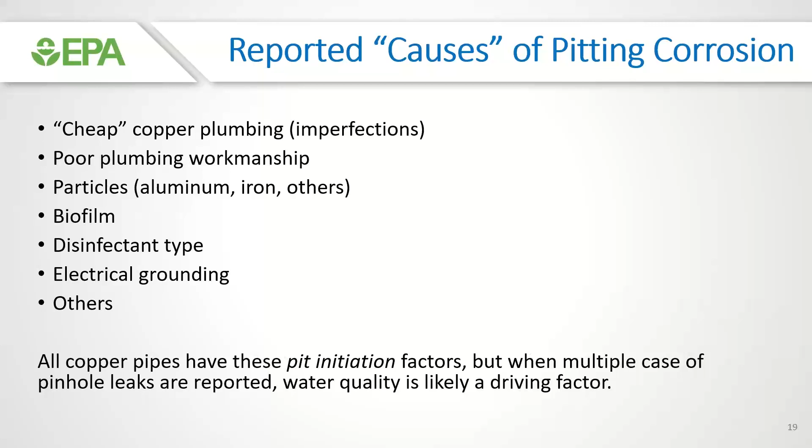Others. And I stress and highlight causes because I don't think they're causes. People say they're the cause of the problem. I think they are factors that are associated with the initiation. But I would argue, and I think most of you would agree with me, that every pipe in every community has these things. Every pipe, right? So the question really is, what drives it? And I think when you see relatively widespread community issues, water quality's got to be an important driver. If there's one home in an entire community of 500,000 that has a pitting problem, there's something going on in that home. But when you have hundreds, then it's a different issue.

So when do I see problems? Well, over the years, and I mean decades, I would say 80 to 90% of problems come about in the case of low DIC waters, that is 10 to 15 milligrams of carbon per liter, high pH 8.5 to 9, chloride concentrations greater than 10, maybe sulfate's important, hot and cold water could be either issue. But anyways, that's the magic water right there.

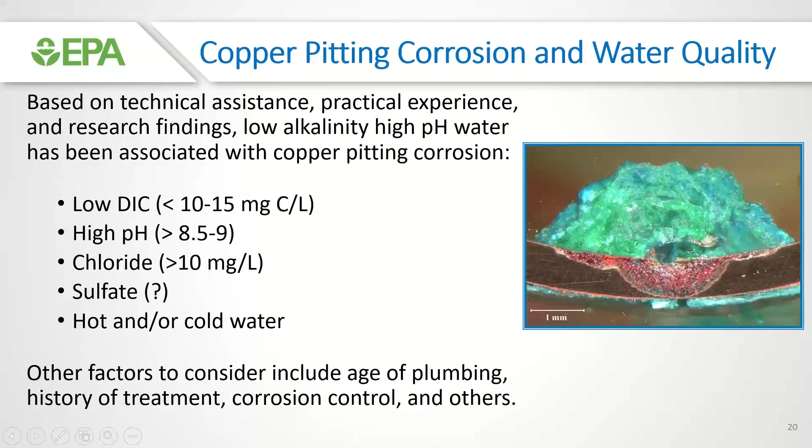It can stray outside of those bounds a little bit, and sometimes it does, but those are the issues. And that's the water that I always say, if you're changing your water source or changing your treatment, look out for that water. Be careful, because this is a great water for keeping copper levels low, but with pitting corrosion, you better just be aware that it could raise some issues. Other factors to consider, including age of plumbing, history of treatment, and other things like that, we need to think about as well.

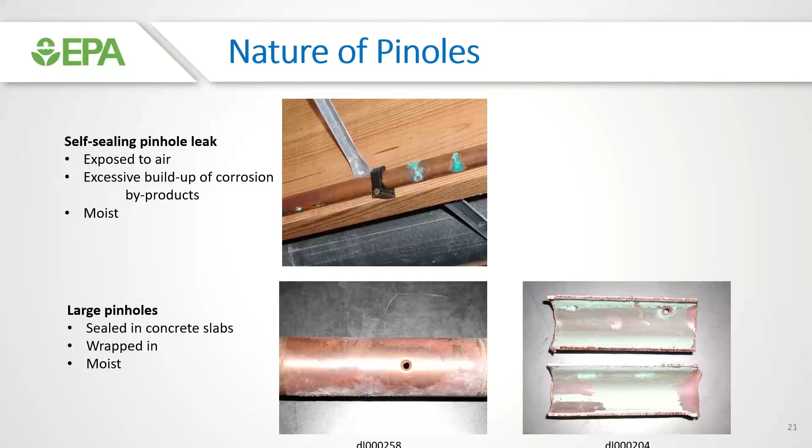Just wanted to show you the nature of pinhole leaks. Interestingly enough, a lot of pinhole leaks kind of seal themselves from the outside. You get this coating on the pipe. It looks kind of nasty, but you don't see the drips anymore. When do I see that? Well, I see that when the pipes are exposed to the air. But when you get something like this, when does that happen? That often happens when the pipes are not exposed to the air. They're wrapped in insulation, maybe they're under concrete slabs. Then you can run into these big issues that eventually spill out and become a big leak problem.

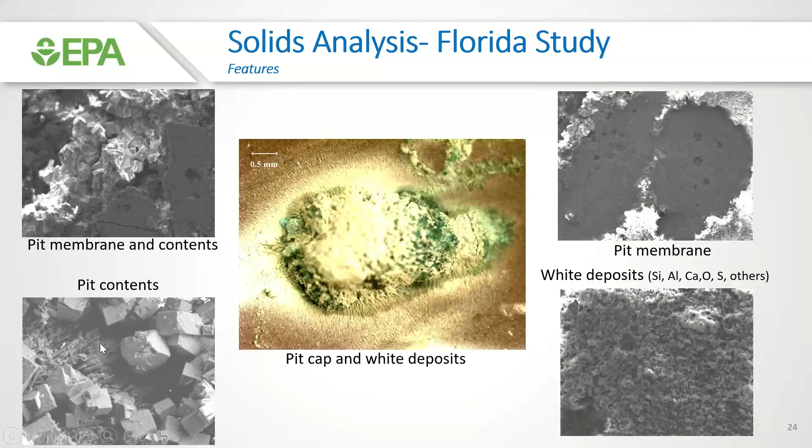This is after you take the cap off, you've got this pit membrane of cuprous oxide, and it oftentimes has little holes in it. And then below that are the cuprite crystals, beautiful, perfectly formed crystals of cuprite. So ideal conditions for cuprous oxide. That's right, cuprite, formed, and so really nice crystals, well formed.

I did want to point out this. I mentioned to you earlier, I sort of skimmed over it, but it's important to look at other communities. This is just an illustration. Let's point out the top two communities. These are in Butler County, Ohio. They had some issues a number of years ago. High pH, low DIC. There it is.

Chloride concentrations are significant. But interestingly enough, Site 1 and Site 2 were also communities near the Butler County site, receiving water from the same aquifer, treating it in the same way. Very similar pH, inorganic carbon concentrations are very similar, chloride concentrations are similar, but had no history at all of pinhole leak problems.

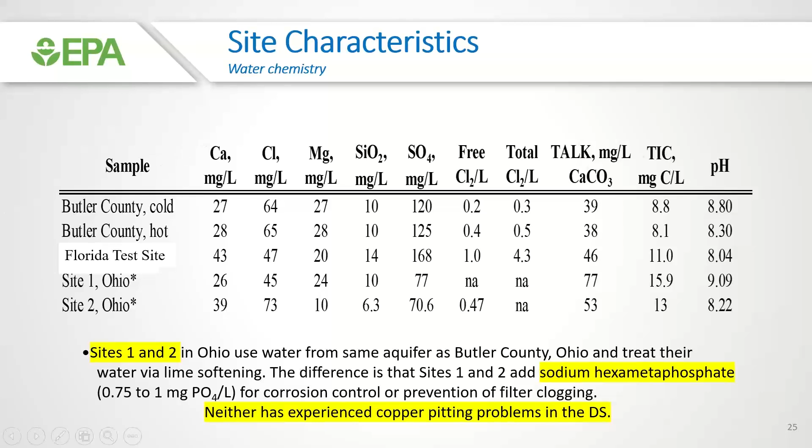Why? Well, as it turns out, sites 1 and 2 actually use sodium hexametaphosphate in their distribution system. That's important information to latch onto, because that just suggests that there's something going on, perhaps there with the polyphosphate. So it's important, as you think about doing an investigation, what's happening nearby.

Like soluble copper levels in uniform corrosion, you can actually do some piloting as well. It's just a different thing. You're not really interested necessarily in copper levels because, as I said before, they're low. But what you're doing is you're spending time looking at the pipe surface itself instead. So you're looking for that pit cap to form.

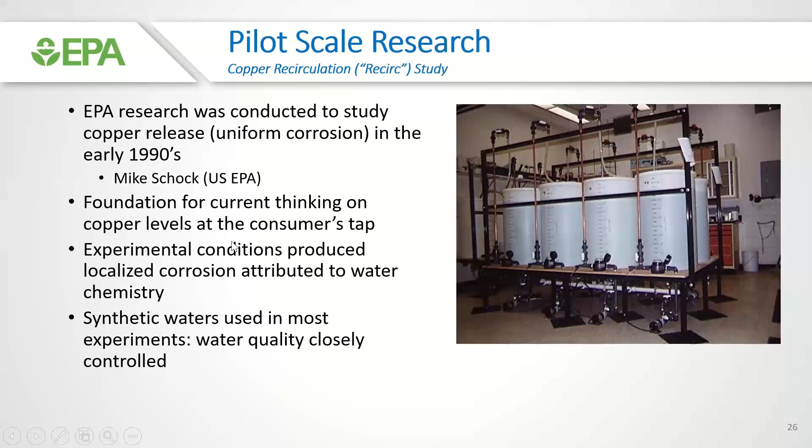And so here we have some recirculating experiments. We've taken new copper pipe from the hardware store and just put it on a unistrut frame, and simply had a utility run water through it and periodically pull. We had little union connections, pull them off, look up the pipe and look for the pit caps. And it worked amazingly well. It took several months for something to develop, but it's something that might work if you're in a desperate situation.

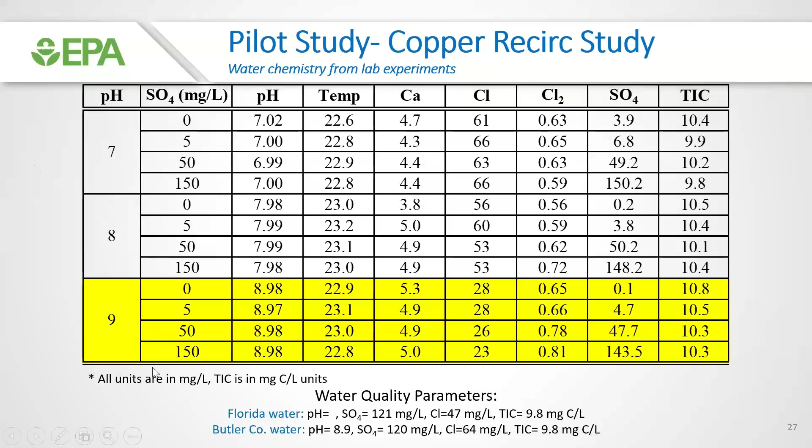We did these experiments with different TICs or DICs, different pHs, 6, 7, 8, and 9, different sulfate concentrations. But all I wanted to show you here was that at pH 9 and the low DIC, what we found again are these little splotches of corrosion byproducts. And when we do our cross sections, we see below those caps, in the low DIC waters at high pH, sure enough, the local attack.

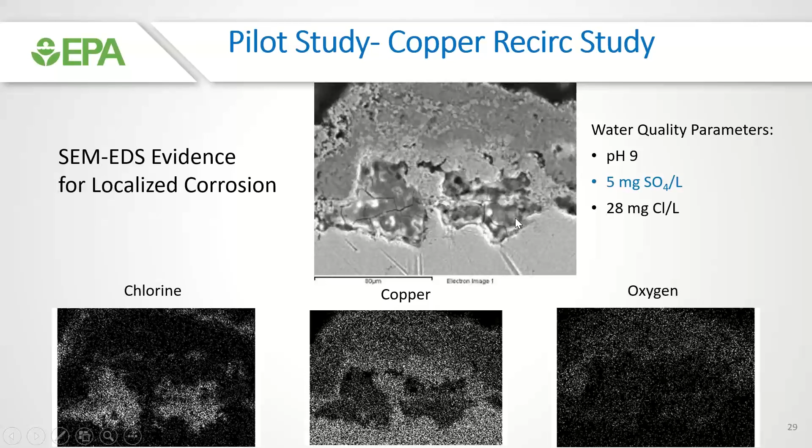And so we see the cap with the copper sulfate minerals, and I should have mentioned this earlier, but chloride ion is always at the base of these things and is always actively accelerating and keeping the corrosion process moving along.

But can you stop a situation that's already going, a long-term issue with pitting corrosion that's well established? So this is actually full-scale data; we received pipes from a community after 10 months of adding a blended phosphate.

And what we found was that within the pit cap, so we stripped the pit cap off the pit itself, and within the pit cap, we saw rings of orthophosphate. So, what we observed is that the frequency of pinhole leaks slows down when orthophosphate is present in an existing situation, which is a good thing. They don't necessarily completely stop, but slowing down is a success sometimes in these situations.

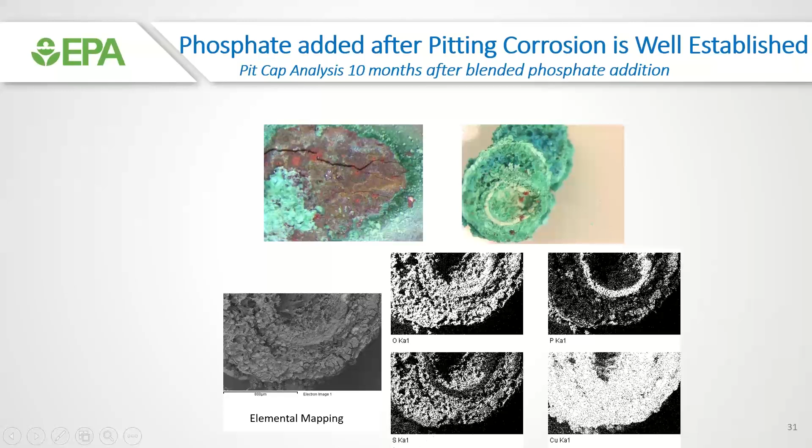And somehow, in some way, the orthophosphate could be sort of sealing off the anode and/or cathode in the cell. So I think more needs to be done on that. And I always tell people, I don't know how long it will take to stop the existing problem, but it may slow it down.

So some additional thoughts. History of the community is really important. Age of homes experiencing pinhole leaks in the community is really important. I get this all the time. We have this community, and there's only one part of the community that has a problem. Well, 9 times out of 10, it's the part of the community that was built most recently.

The older part of the community had a history of different water quality changes over the years, and those pipe scales developed in a different way that made them protective, we'll say, to the current water chemistry, whereas the newer homes, not so much, right? They saw this new water, the problem water, from the get-go.

Again, I mentioned this, check nearby communities, see what they've got going on, hot versus cold. A lot of times the problem is a hot water problem only, or it's a cold water problem only. And so I get a piece of pipe from the cold water where there's a problem. I'm like, well, what about the hot water? I'd like to see that pipe too, because that may tell you something about why it's not a problem on the hot side. It may give you some information that could be helpful.

Tracking the problem is always a challenge because no one wants to talk about this, right? The water utility, what are they going to do? I mean, they meet the action level by far a lot of times, right? So whose problem is it? And this is where the blame goes around.

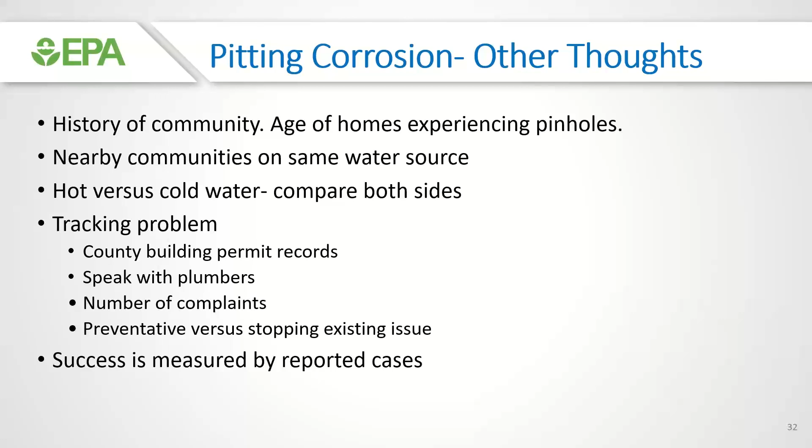But you can speak to plumbers. Listen to the number of complaints that you might hear out there. Those kinds of things are important. Success is measured by the reported cases. So again, if you have 20 cases of reported pinhole leaks a month and it drops to 5 a month, that's success.

So to wrap it up, and I know I really went through this fast, but I wanted to leave time for questions. Copper aging is important. Copper 2 solubility is greatly sensitive to DIC and pH. Orthophosphate reduces copper solubility, which could be very helpful, particularly in high DIC waters where pH adjustment may not be appropriate and challenging. Pitting corrosion is very complicated. I could talk about this all day. And the associated investigations have to consider multiple factors.

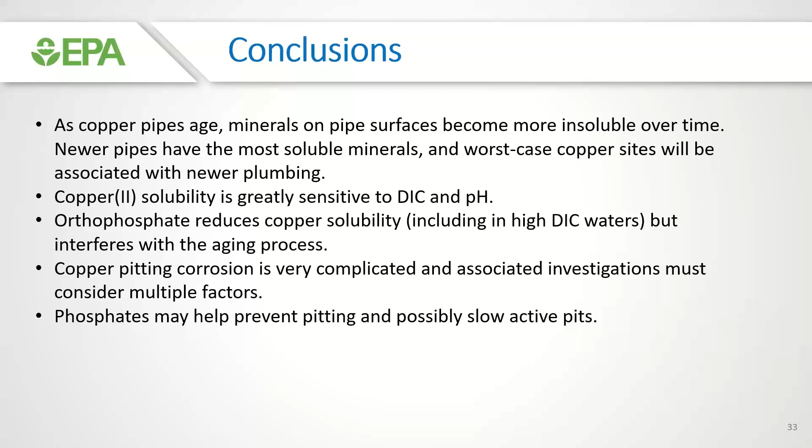So again, I hear this a lot of times, oh, we're gonna take the pH up from 7.5 and we're gonna go to 9, and the DIC is 5. And I'm like, oh my gosh, your copper levels are gonna come down, but be aware that pitting corrosion could be an issue for you. And it doesn't show up right away either, right? It usually takes time. It takes 5-10 years before that pinhole actually breaks through. The pitting corrosion takes time to get through the copper pipe wall.